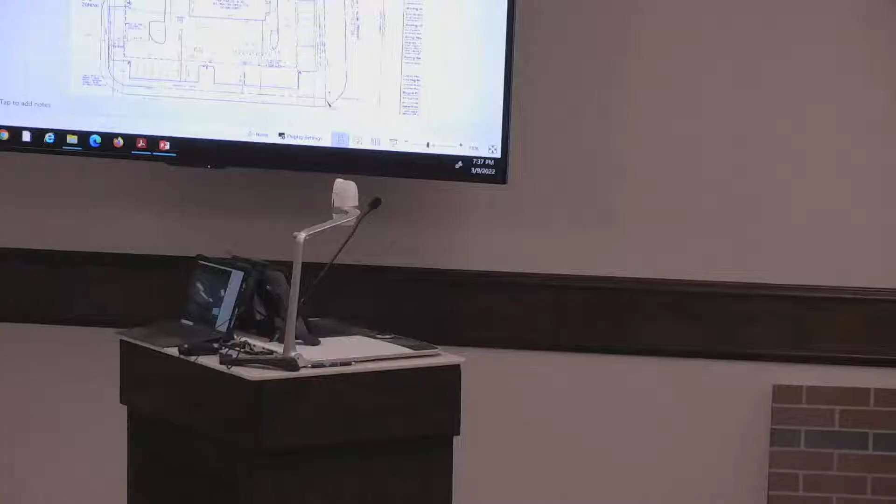Mr. Chair, this is a small addition to the Applebee's restaurant at 10526 Belleville Road for the purpose of having a pickup booth where there will be some vehicle stacking. That land use is most similar to what we would call a drive-through or drive-up window, which requires a special land use in Van Buren Township, even though it's a very small addition to the building at only roughly 400 square feet. All special land uses require both special land use review and a recommendation to the Board of Trustees, along with the public hearing we just held, and site plan review.

So the purpose of our comments at this point is to go through the special land use report and then the site plan reports, and then we'll consider two actions on the project for both combined preliminary and final site plan review, as well as the special land use recommendation to the board. So with that, I'll defer to our planning consultant, Vidya Christian, for her comments.

Thank you, Director Power. As you had summarized, the applicant Applebee's is proposing to construct an addition to the existing restaurant on Belleville Road. The Planning Commission is familiar with the site. It is located on one of Walmart's outlots and is zoned C2, which is Extensive Highway Business District, and it's also part of the Belleville Road Overlay District, or the BROD as it's called.

The proposed use is classified as a drive-through, even though it is a small to-go addition to the building, and as such requires special land use approval. There are specific requirements in the ordinance based upon which every special land use is reviewed and considered by this commission. I shall go over those in brief.

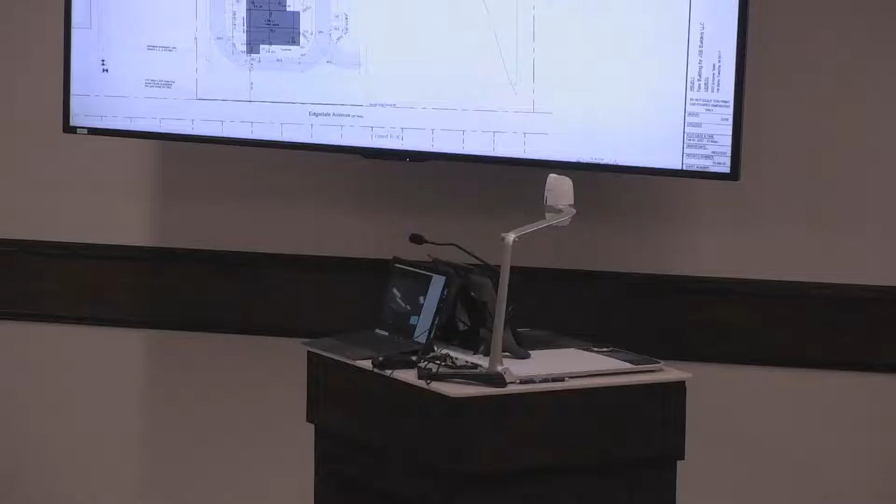Thank you, Mr. Chair. Your summary of the case is all I would have said, so I'll defer this to our planning consultant and then our township engineer, and then I'll speak on the fire marshal's comments before we hear from the applicant. Thank you, Director Power.

As the chairman summarized, the applicant JSB Builders received preliminary site plan approval from the Planning Commission on September 8th, 2021, to construct a light industrial building with multiple tenant spaces and a truck well. That approval was subject to several conditions. Typically, after preliminary site plan approval, they must finish making corrections and meeting conditions along with engineering, then come back for final site plan approval, which is what they have done at this time.

I'll summarize the conditions you placed on this plan in September, since it's taken them a while to come to final site plan approval. They were required to stripe the crosswalk connection from the sidewalk on the south side of the building to the sidewalk along Schooner Drive, which has been done on this project.

There was also the correct notation of the number of parking spaces on the northwest side of the building. There was an error in the number of spaces noted, and they did make that correction.

We had asked for clarification regarding the truck bay shown on the building. On the west side -- I always look at it upside down, so I thought it was the south, but it is not the south, it's on the west side of the building. We asked the applicant for clarification as to how the truck well would be used by other tenants, or if it's limited only to the owner who intends to occupy that corner unit.

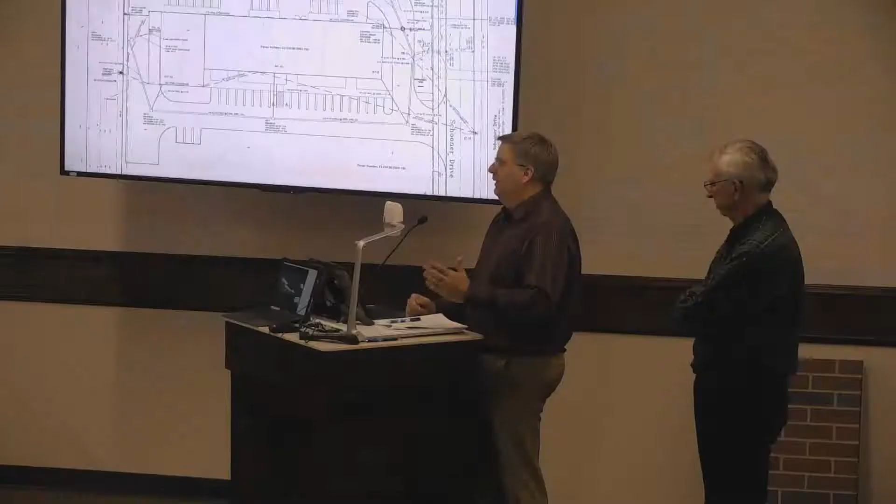So yes, we've been going through this for the better part of a year. Going through the last set of review letters, there are two things we have outstanding. We don't have an issue with putting a date on the development of the landscaping on Schooner Drive. Mr. Patel's a little hesitant about putting that in because we're not sure exactly what we're going to do in terms of drive cuts and sidewalks and things like that, so he'd prefer not to spend money that he's going to throw away. It was proposed, talking to Dan tonight, about a bond that would cover the cost of those trees, which makes sense because that money would then turn around and get spent for the landscaping, and we wouldn't necessarily be wasting it today. If we knew what we would do two years from now, I wouldn't be standing here.

So it's a little bit of a first for him. He's relocating his business to Van Buren Township from Ann Arbor. He's taking the westerly portion of the building for his business, and in his mind, in order to justify building the building, he wanted to do a multi-tenant building that he could rent out to multiple tenants. So we designed his area first, then the tenants, giving them actually the better portion of the site, access to the drive and whatnot, in order to encourage development of it.

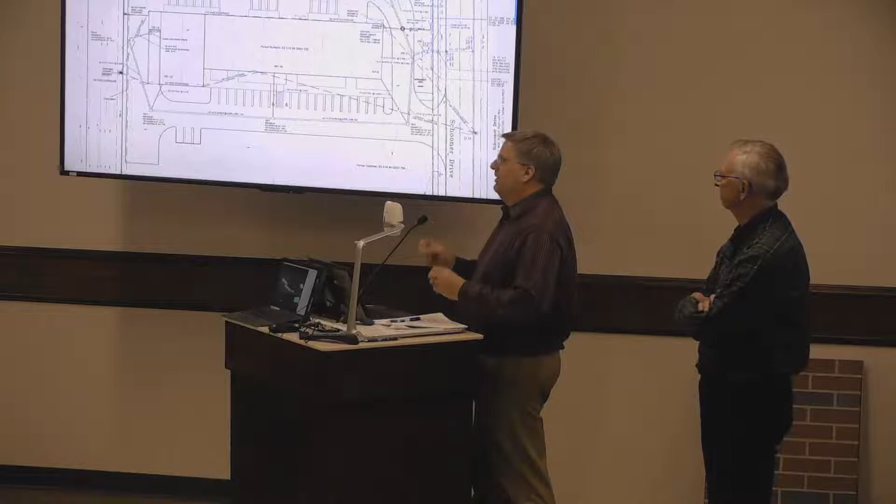He currently is in a building very similar to this without a truck well, and that's part of his problem, because about once a week he gets tractor trailers and it's tough to unload them when you only have a 10 by 10 overhead door. So that was what drove the necessity for the truck well. He may or may not allow tenants to use it—as was stated, it will be subject to their lease agreement. So there's not going to be any heavy industrial use like that, it's light industrial, small businesses, things like that is what he's catering to. In a perfect world, he'd like to build another one of these and then maybe another one, or maybe it's one bigger building depending on how things work out.

But we see what can happen with our economy.

Back to the landscaping, we don't have a problem making an agreement that we could post a bond when we get into construction for future landscaping down here.

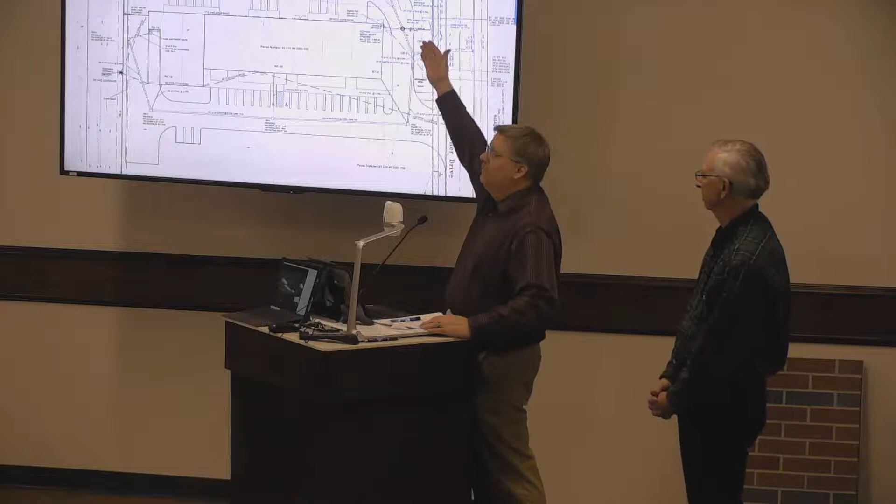I know we've been going back and forth on the stormwater. He bought the property being handed the deed restriction that said you don't have to do detention, so he bought it. We've been working through all kinds of documentation to see if we could find any information, because somebody approved it—otherwise it wouldn't be there. The two adjoining properties to the north are using the stormwater system in the street, draining to it. There are leads to the property that have stormwater calcs to them.

So we're willing to work through this and try to figure it out. What was the name of the engineer? Oh, Stantec. We will reach out to them and see what we can track down—there's a job number on there. We'll work with you guys. Hopefully they've got records, and I sent some additional information today to Orchard Hills, so maybe they can pull something out of their files. It's funny, 1998, 2000, 20 years ago, that's a long time ago. I have everything I've ever done as an architect going back to '92. So I find that odd, but whatever.

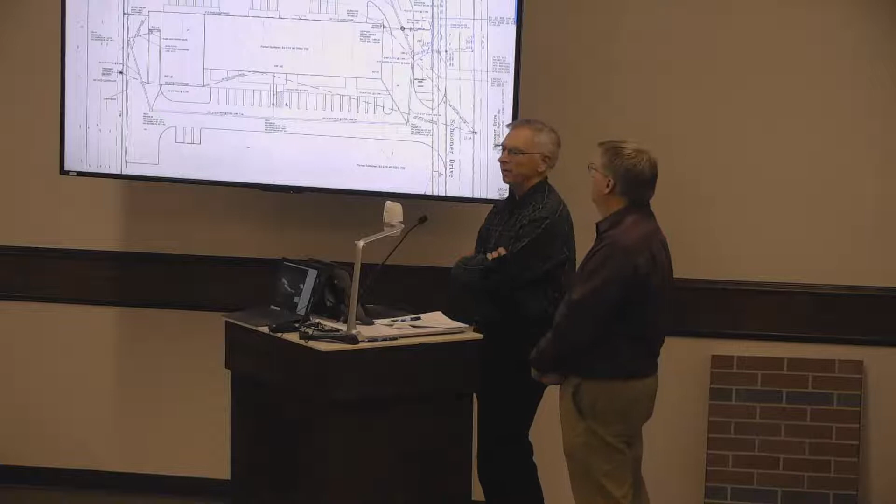And if I could add just briefly on verification of the storm system, we're glad to work with you on details to figure out how to verify what's there, if we all go out and look at it, because there are end sections and culverts, under drains—it's not all enclosed. We don't have to go down into manholes to see how things connect into the open drain going down to the pond. We're glad to work those details out with you to your satisfaction. Okay, same here, guys. Okay.

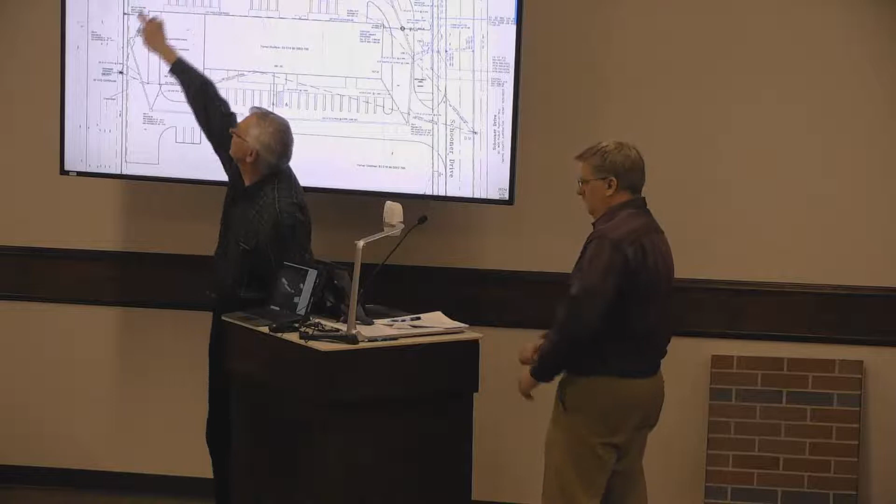And if I may, for the hydrant coverage, we did speak with the fire marshal and sent out new drawings that I believe he approved. We're taking this hydrant and putting it here, and I believe he's satisfied. Yeah, that was my recollection as well from talking with him.

I don't think I broke your building here. Sorry for the trap there. Questions you may have—thank you so much.

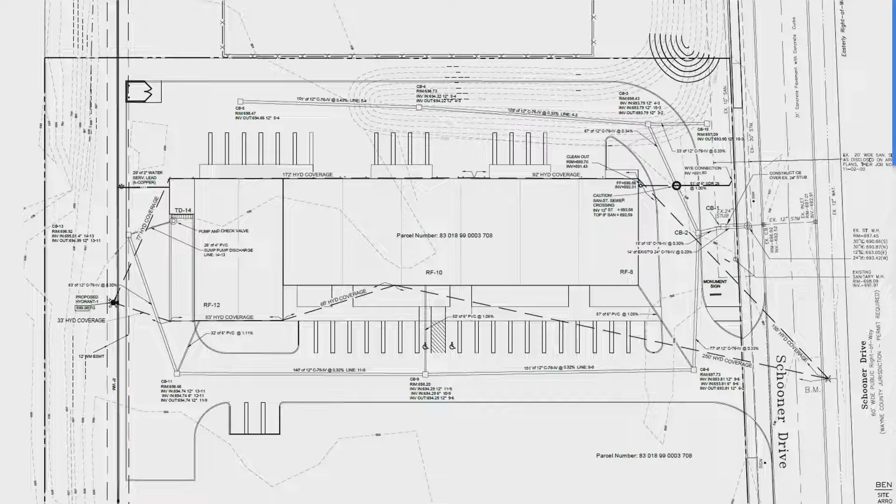Any questions or comments from commissioners? Commissioner Jar: I do have a question for Mr. Potter. What is the applicant's recourse if they cannot find the information on the drainage system that you're looking for?

Well, we're trying to be positive that they will find some records. There are records somewhere, but as was stated, several years ago around Y2K, if things weren't microfiched they usually got pitched. A lot of these older drawings—record drawings for permit applications and plan reviews—disappeared. It was paper and could fill up a room like this. Things happen. So if the microfiche doesn't exist, later on they scanned all that and threw the microfiche out. So it's a task trying to find some of these older as-built drawings, and we look for record as-built drawings.

The other recourse would be to try and reverse engineer it, but for this property owner it would be quite an exercise to try to recreate something that's there, because it involves potential easements with a county drain, as-built easements based on the amount of flooding, and that should have all been taken care of in the original plans when the property was developed and the original plat was dedicated. So we do see a lot of things that show up on deed restrictions that, quite frankly, are no longer valid or legal later on. That's why we have to look at it—we know what it says, but we don't know what that means, so we have to have documentation to show it. Unfortunately, we have some drawings now that I think you received this afternoon, so that's a start.

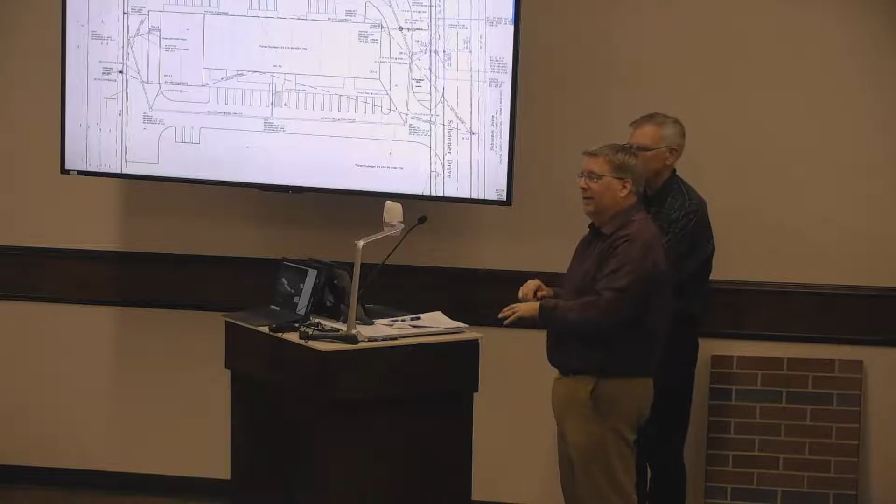No, our understanding is the west side of Schooner, the entire road. Does it include Contractor Steel, which is to your south after the vacant lot? Well, it might, based on what you found tonight. Because Contractor Steel went through a site plan approval, or they almost went through engineering for an addition not so long ago, and then they abandoned it.

They might have some documents that might help you. You might want to reach out, because I know Mazer Polymer built not so long ago, and so did Contractor Steel. They went through the project process, but then they decided not to build for whatever their internal discussions were. But maybe they have some engineering documents that might help you.

Yeah, the engineer that did the two northern properties was adamant that we didn't have to do stormwater detention. So I'm like, let me see your stuff. He moved from one office to another in that timeframe. He's like, he found a few fax documents and some stuff with OHM.

Do the owners of those buildings not have copies of their original approval documents, even if the engineer is gone? I don't think they're the same owners. It's different names in the agreement than what's occupying those buildings. Now, it's possible, but I find it might be that most owners don't have anything.

Right, it might be worth reaching out to everybody down the street, including Contractor Steel, to hunt those down. Steel might be the best bet, since they were there 22 or 24 years ago, right? Yeah, contractors don't throw anything away, okay?

So I will add one more thing. I did take the time to call the Wayne County reviewer, who is OHM, and I spoke to the engineer and I said, how could you approve this without acknowledging these plans? And he said, well, that's come up, we're being questioned on that. So they may be rescinding that letter, but it's for the same thing.

And it's just a factual thing that has to be buttoned down here to say, okay, does it in fact exist and where? Because if it exists, I can tell you it's an easy calculation that was done: the drainage breakup sheet, the calculation, the follow-up easements, their as-built easements, and it should be fairly easy, but you just got to find the drawings, okay?

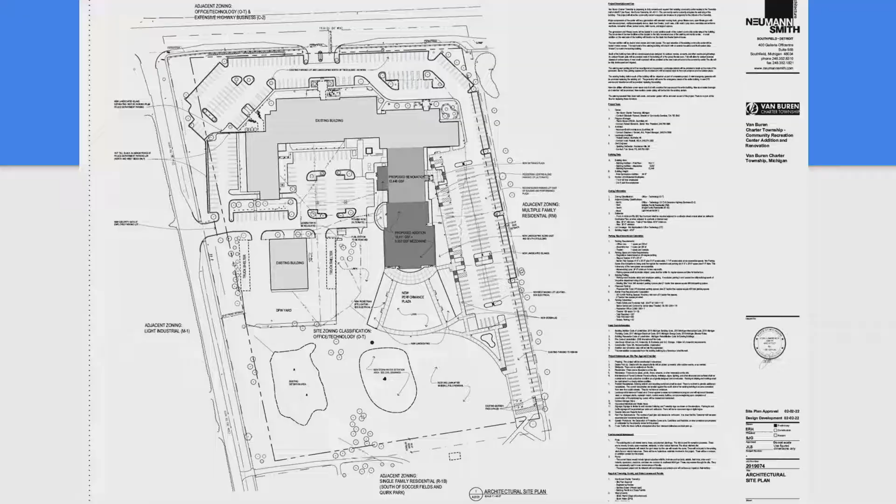I can summarize it, but I think our applicant will be able to go through that better than I could. But there are going to be a variety of indoor and outdoor activities at the site, and again, it's on a campus that's about 14.5 acres. The proposed building addition, by the way, has a height that'll be about 34 feet, 8 inches tall.

There's a portion of the architectural site plan included in your packet that goes through all of the programming of the site. Just to summarize, it's a publicly owned recreational facility. That's the basic use that's being proposed for the addition. That is a permitted use by right in the OT zoning district.

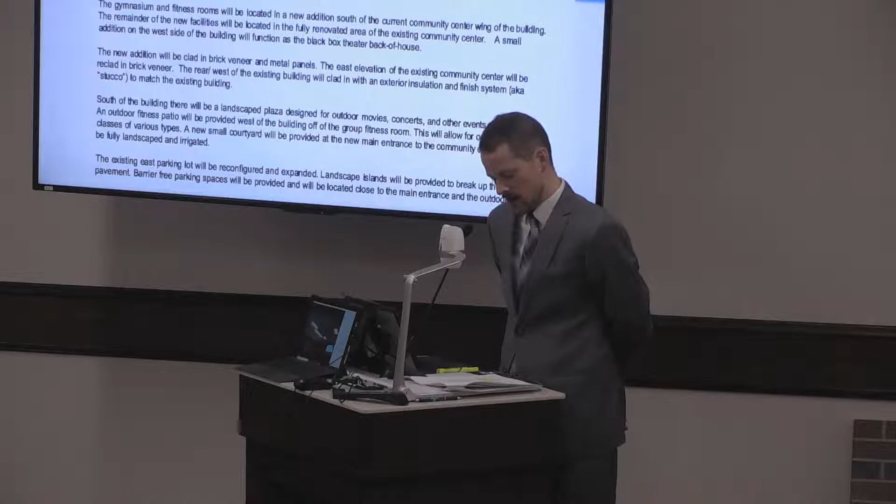It behooves us to acknowledge that there are aspects of the site that are outdoors, and these are accessory to the principal use. That's important to mention because outdoor uses as principal uses are prohibited in the OT zoning district. But of course, within the OT zoning district, you have public schools, public recreational facilities like this one, and this one has been used in the past for a variety of both indoor and outdoor uses. So this is very much consistent with past use of the site.

Again, I'll let the applicant speak more about the programming. My comments are more about the exterior of the site and the architecture of the building. In looking at the overall site, I'll go through a series of comments that fall into categories guided by our zoning ordinance. Firstly, the dimensional requirements of the site are met.

There's a required 50-foot front yard setback, a 50-foot side yard setback on sides adjacent to residential zoning, and a required 30-foot rear yard setback. There are some boundary lines that are listed as approximate on the site plans, but the improvements are consistent with the existing length of improvements on the site. So as long as there's no encroachment within a few feet of that property line, there should not be any issues with that note in the plans.

I would like to go through some things regarding access, circulation, and traffic impacts. Overall, one of the most important things to note with the site is that based on some restrictions that were sought by our elected officials and our public safety department, as well as our public services department, there is a restriction of access to the employee parking and public safety personnel parking areas. This does affect some of the layout items on the site.

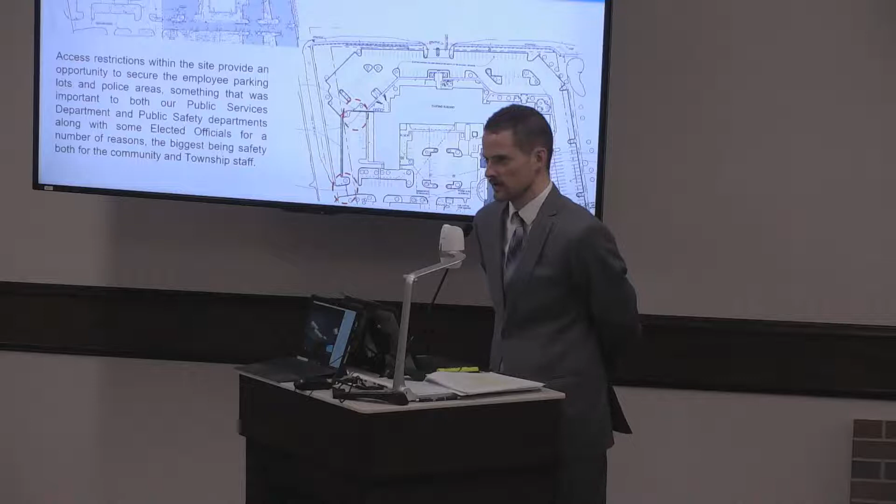Right at that northwest corner of the site where the parking lot angles in, there will be a closure and a little bit of a landscaping island there. There will also be a gated access for employee parking. The public safety justification for that is compelling, and the design of the building supports that closure.

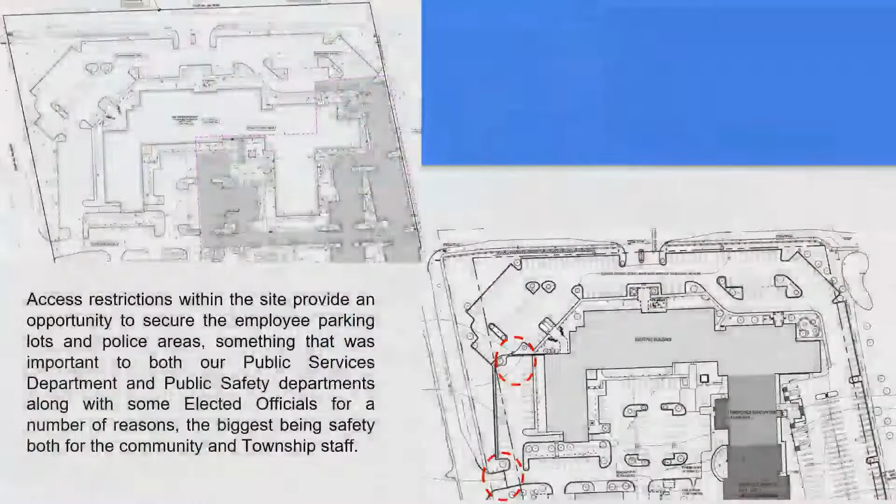It's important to talk about this because we have to acknowledge there are about 400 parking spaces proposed on this plan, about 305 of which will be visitor parking. That parking will access Tyler Road on the main driveway.

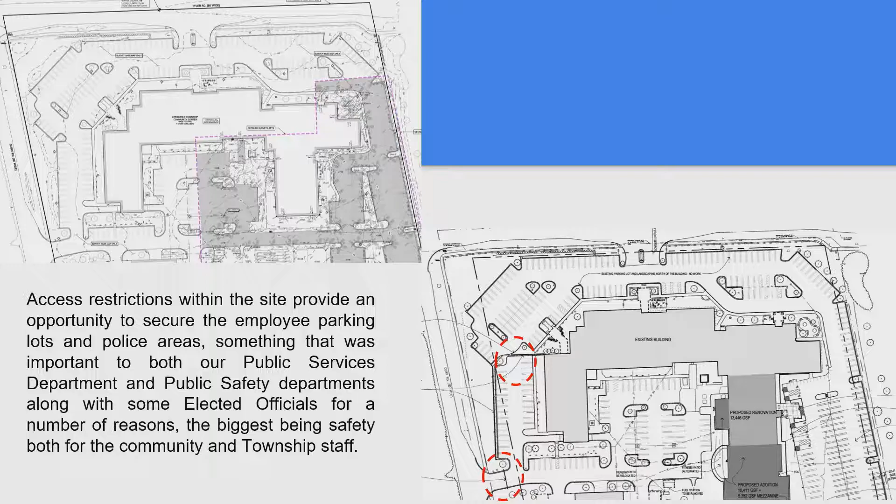In reviewing that, both staff from the applicant's side and reviewing staff have talked about this, and it is a logical way to organize the access to the site when you consider that a lot of the use of the building involves complementary activities, smaller gatherings in different spaces within the building, and it's very unlikely that the entire parking lot will be full at a given time. So overall, I do recommend that the Planning Commission approve the access configuration for this site.

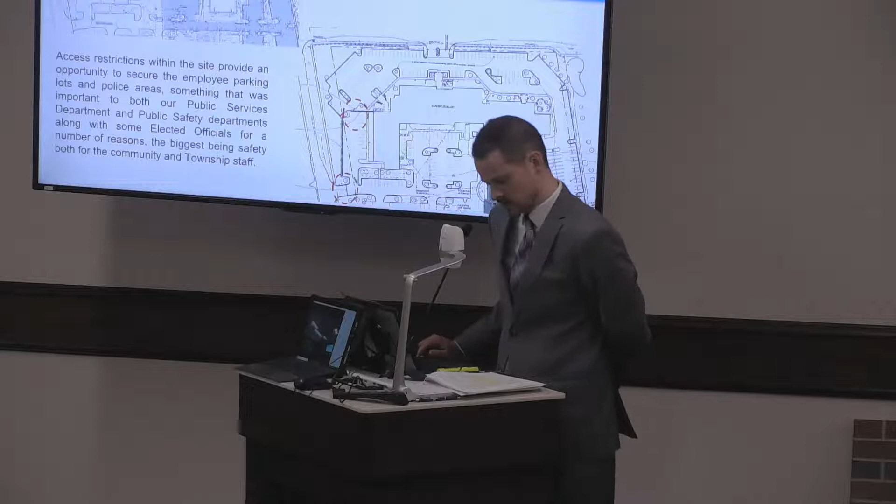A couple of minor notes: there will be significant additions of sidewalks throughout the site. At a high level, you're going to have sidewalks that access the parking areas along the east edge of the building, as well as the campus along the south end of the building throughout the area that connects the parking to the plaza.

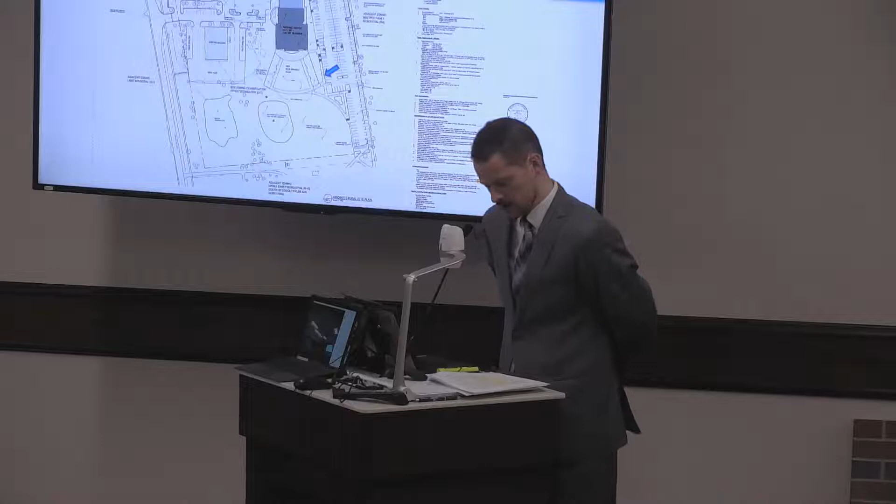Parking spaces—this is a point that comes up in every site plan review. The applicant has demonstrated both the adequate dimensions for parking spaces as well as the adequate number of minimum parking spaces. There's only a small addition of parking on the site with this proposed site plan, but it does meet the minimum zoning ordinance requirements based on the usage of the building.

This includes 181 spaces being required for the community center and senior center, 7 spaces required for the recreation center, 50 spaces required for the theater, as well as 119 spaces required for the existing Township Hall offices and public safety areas.

One condition I have regarding parking configuration is that there should be a designated snow storage area in the parking lot to make sure there's adequate room to place the snow in a way that doesn't conflict with parking.

Landscaping and screening is a big source of a lot of planning review comments. We have a very robust landscaping ordinance, and it was important for us to reflect that ordinance in this review, making sure we were fairly reviewing this in a way that really reflected the portion of the site that's being worked on today.

There has been a recent overall campus re-landscaping effort in the last couple of years, with new landscaping installed on the north and northwest edges of the campus. So what I really wanted to do here was focus on the area of the site that's being improved and apply the applicable landscaping standards to that portion of the site.

I'll read from those standards. The first, under section 10.103A of the zoning ordinance, regards frontage landscaping. There really is no new frontage area adjacent to the public road, so that standard is already met and does not apply to this new review.

When we get into parking lot screening, there's a 10-foot open space buffer surrounding parking lots along the site's frontage, and that remains in place. Then you get into the details of the parking-based ordinance requirements, which get pretty detailed. To summarize: essentially 5% of the interior parking lot area requires landscaping, and there shall be one deciduous tree planted for each 300 square feet of interior landscaping. Those are some of the most significant requirements regarding interior parking lot landscaping.

Based on those requirements, the applicant has met the minimum standard by providing about 3,203 square feet of overall interior parking lot landscaping required, which would be about 11 or 12 trees, and there are 15 trees proposed, so this standard is met. There's no new loading area and no new display area, so there are no landscaping requirements regarding those items.

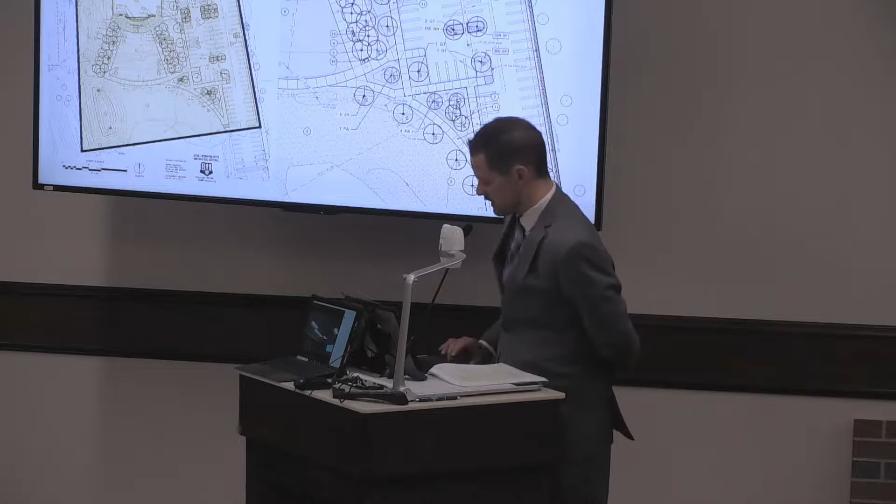As far as green belts, this is an important one to go through. You can see on this image the line of the existing parking on the east end of the site—it's less than 5 feet from the adjacent property line. Now, the adjacent property line is the Meadows of Van Buren condominiums, a residential land use. However, there's a significant existing open space buffer separating this site from any of the neighboring properties.

So it's reasonable to maintain that line of parking adjacent to that site and continue that reduced setback. I would recommend that the Planning Commission modify the green belt along that east line from what's required—20 feet—down to the 4 feet 9 inches that's existing.

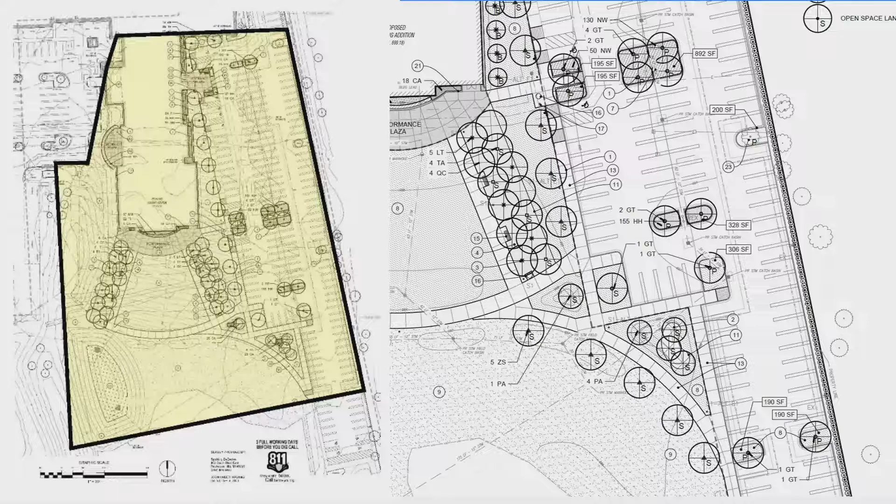This reduced setback has not been an issue for any of the past uses of the site. There's been no issue with the relationship with the neighboring property from softball games or other outdoor activities. And there will be significant shrub landscape screening along that edge of the site, so staff supports modification of that Type B greenbelt buffer requirement along the east edge.

I also recommend that the Planning Commission modify the standard requirement under section 10.103E subsection B to enable 3 shrubs per tree in place of what's otherwise a requirement for 1 tree every 20 feet along this area, based on some constraints on the space available for a root ball of a tree.

Getting into some specific standards for the office technology zoning district regarding landscaping. Essentially, your perimeter of your building defines how many trees and shrubs you require around the perimeter of the building. This standard is met, except for one adjustment I'm requesting, which may be due to some lack of clarity on the requirement.

There's actually 1 deciduous tree required for every 40 feet of perimeter, and 1 ornamental or flowering tree required for every 100 feet of perimeter. The provision by the applicant has been switched, so there's more ornamental trees than shade or deciduous trees. I'm recommending we go back to the ratio of 1 shade, deciduous, or evergreen tree per 40 feet and 1 ornamental tree per 100 feet. So that's a minor adjustment to the plant list.

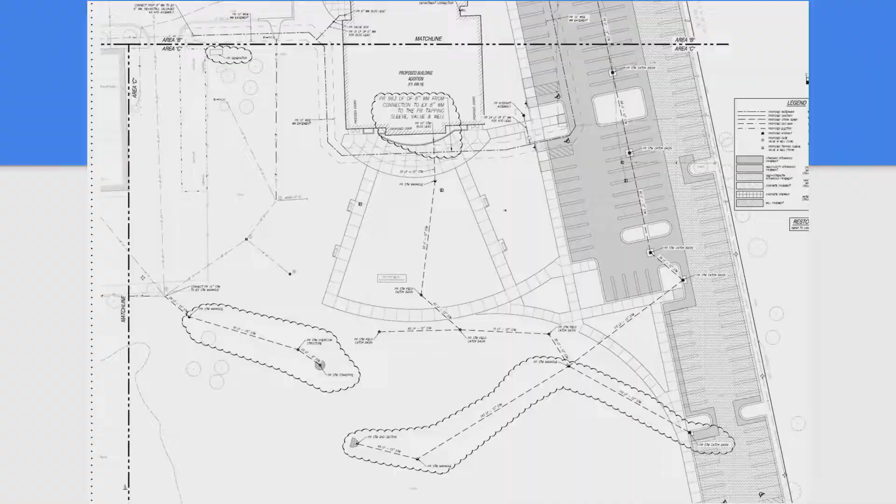Quickly on lighting, there is existing lighting that's being relocated, so there's really no new lighting to consider. There are no proposed changes to the dumpster. There is going to be new fencing, with a fence detail provided where the fencing secures the employee and public safety areas. I would also ask for a detail on the proposed gate to the employee parking area.

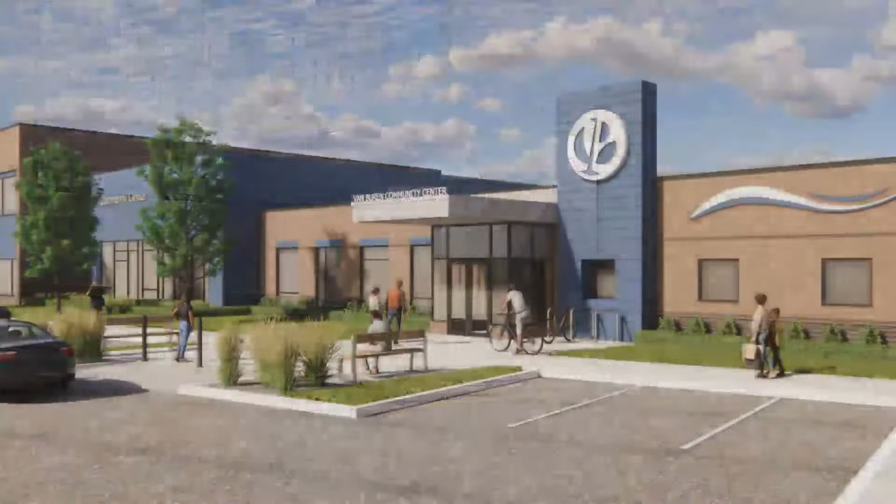Finally, maybe of most visual interest, the architectural character of the proposed addition. There are specific architectural requirements under the zoning ordinance specific to the OT zoning district, which calls for certain treatments including pitched roofs. However, there are findings the Planning Commission can entertain to deviate from those standards. In this case, we have a building that's multi-level, both existing and proposed, more square, with protrusion and depth created by rectangular and square shapes. I think we can modify the requirements of the OT zoning district to allow these changes.

What you're looking at here is architectural metal panel, brick veneer, and glass veneer—high quality architectural treatments on the building that I think tie it in well with the existing building. I think the Planning Commission can accept these architectural treatments, subject to your commentary on them.

The last few comments pertain to signs, and then some topographic and grading information. Signs, there really is not much to say at this point. We'll process our own sign permit for any proposed signs on the face of the building. You can see what the character of the signs is on this elevation. And grading information, there are some minor grading adjustments throughout the plan that are shown.

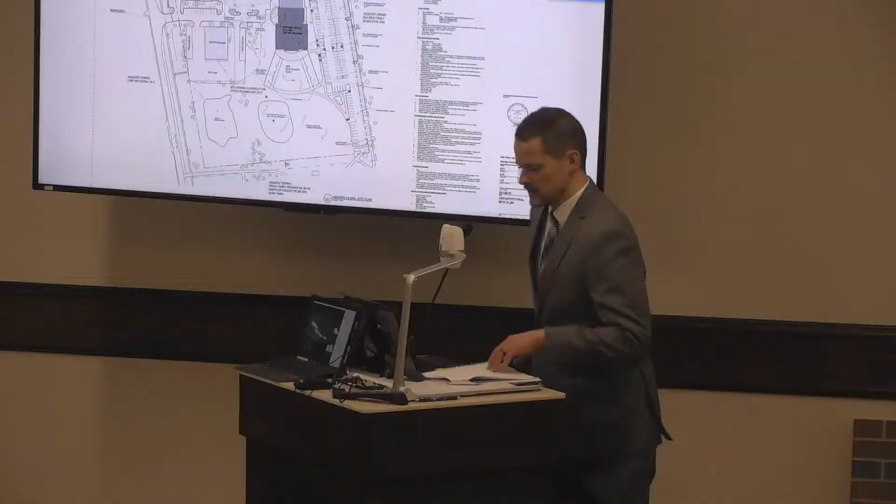Director Power, I believe there's a letter from the Van Buren Fire Department as well. There is, and I'm going to jump over to the other microphone, but I have one clarification in that letter. I'll read the comments, but there's one thing that has been addressed in the most recent correspondence with the fire marshal. His comments summarize that the plan as submitted is approved with some exceptions. The first one, which is the one I'm going to talk about, is that there is a dead-end fire department access road in excess of 150 feet.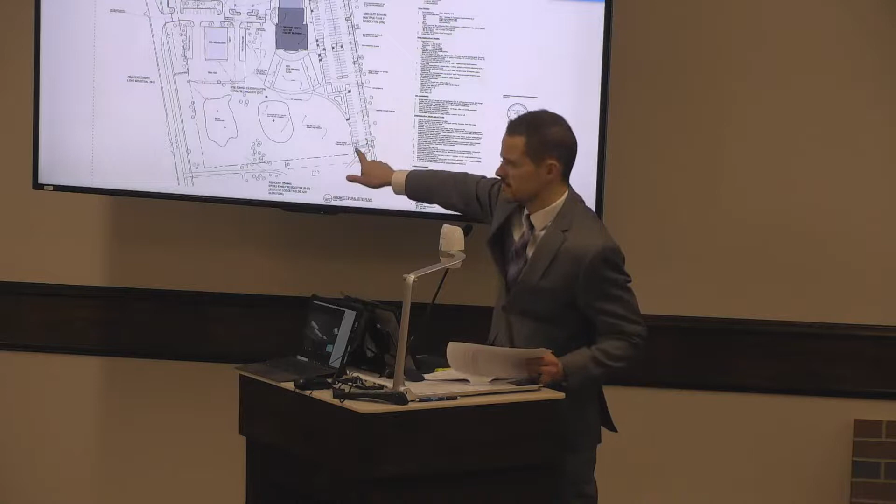What we're talking about there is, if you see on this plan, the long run of the existing parking down in this section of the site includes a length that exceeds 150 feet, and basically the fire trucks need a way to turn around there. However, that's an existing condition and there are no buildings in that portion of the site, so there's really a lot of flexibility to deviate from that requirement. The fire marshal and fire chief have looked at that closely, and they're willing to modify that condition of their report.

Otherwise, there are some comments about water supply. A fire department connection should be unobstructed by vehicle parking. The fire department connection needs to be moved to the southeast corner of the building by the hydrant, or one parking space in front of the FDC, or fire department connection, will need to be eliminated and marked accordingly. Then there are some things that will be addressed during building plan review, such as building, fire suppression, and fire alarm plans, and the provision of a two-way radio communication enhancement system, and making sure there's minimum required radio signal strength for fire department communications.

This is the overall site plan. This is actually an architectural drawing overlain on a Google map image. You can see Tyler Road up at the top, and curving around here is the existing Township Hall, which we are proposing to renovate. This lighter brown area is the area that's going to be renovated, including the existing gymnasium and other spaces in the existing community center. This block down here is the new gymnasium and fitness addition we are adding.

To the south, we are doing an outdoor performance plaza, a concrete area with a large lawn framed by two groves of trees. This performance area will be used for outdoor concerts, outdoor movies, open mic nights, and other events. It's planned to be used mostly during the day, but could be used in the evening as well.

We're also proposing an outdoor fitness patio on the west side that will be used by staff for outdoor yoga classes and things like that. It's right off of the fitness room, which you'll see when we get to the plans. We also have a new entrance on the east side of the building, which ties into our reconfigured parking lot that runs all the way down to Quirk Park.

We've made one adjustment since we submitted for site plan approval: we are going to extend the new sidewalk all the way down to Quirk Park and tie it into the pathway down there. As Dan mentioned, we are closing off the police and employee parking lot over off Quirk Road with a 5-foot-high decorative fence and a security gate at the entrance to that point.

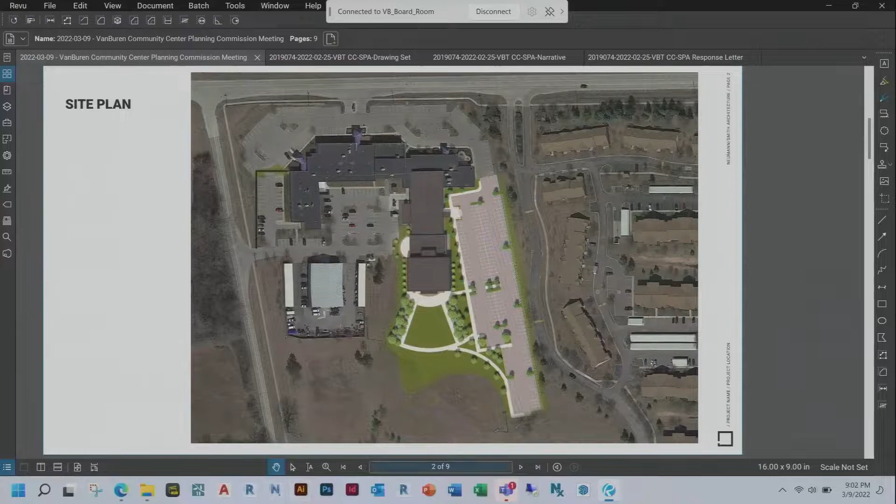As you come in the front doors of the building, the new entrance, there's a new lobby and a new control desk. Behind the control desk are the community center offices. Directly across from the main entrance, we have the Black Box Theater, and behind that a small addition that'll be the back of house space for that theater, including changing rooms and areas to put scenery and props together.

As you come down the hall along the administrative offices, you've got the restrooms and locker rooms, and further down, a multi-purpose party room and a renovated senior room.

Heading to the south, immediately adjacent and open to the lobby, we have a teen area with various seating for kids to hang out. There are actually three 4-person booths where they can sit and do homework or play video games, plus some soft seating and gaming tables. That furniture has yet to be worked out in detail. Across from that, we have a child watch room or playroom and another multi-purpose party room.

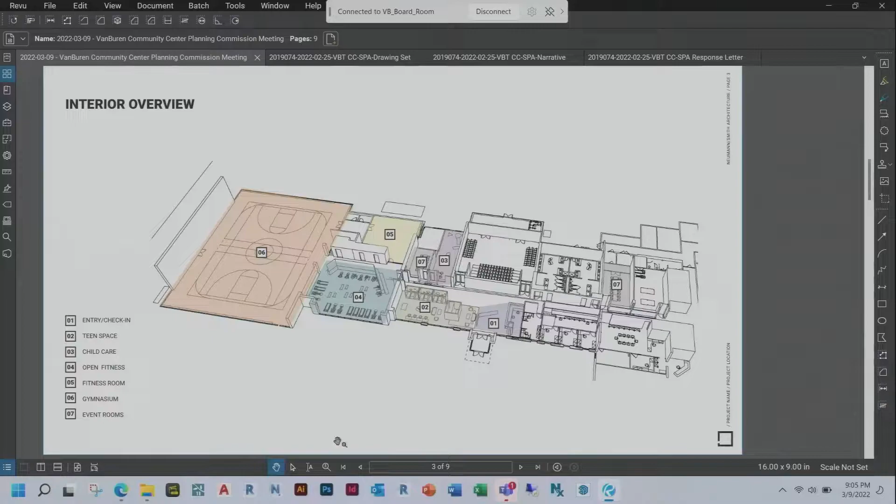This is just the floor plan that we just looked at, if that makes things easier for you to see. Again, we have the new entrance here, the Black Box Theater, the back of house space for the Black Box Theater, the office area, the locker rooms and main restroom facilities, the party room, multipurpose room, the updated senior area, the teen area, the child watch or child play area, another multipurpose party room, the open fitness area, the group fitness area, and then the gymnasium.

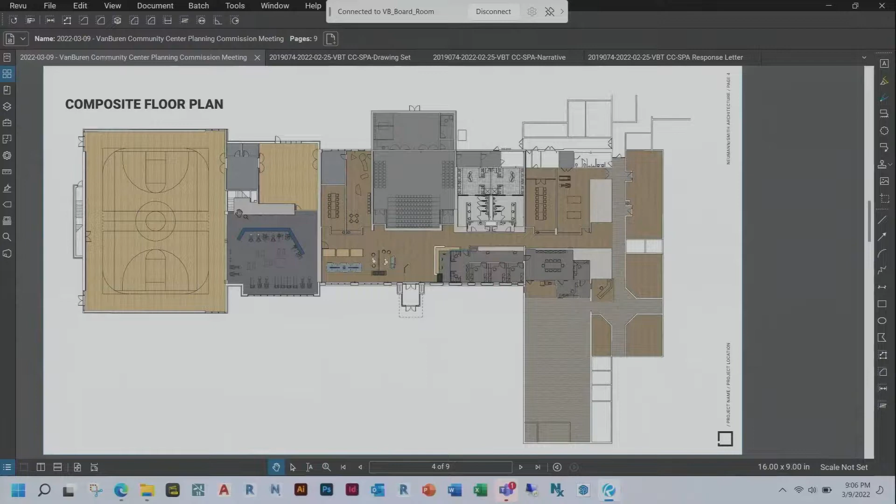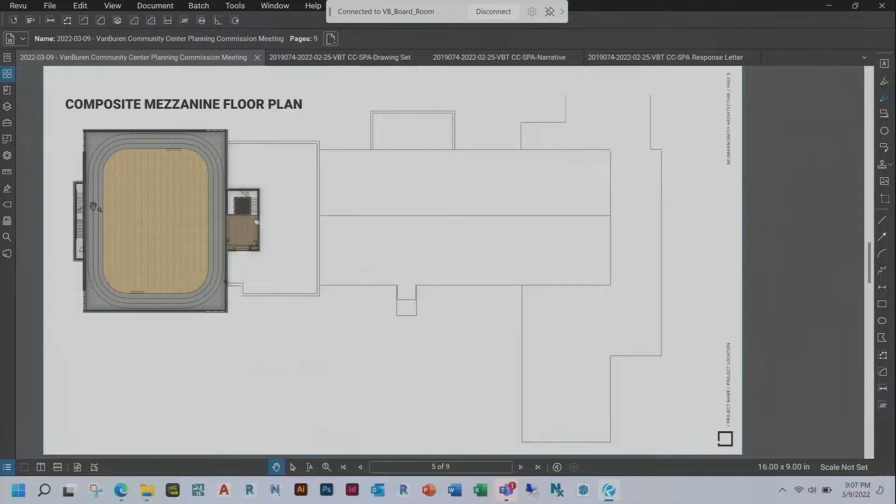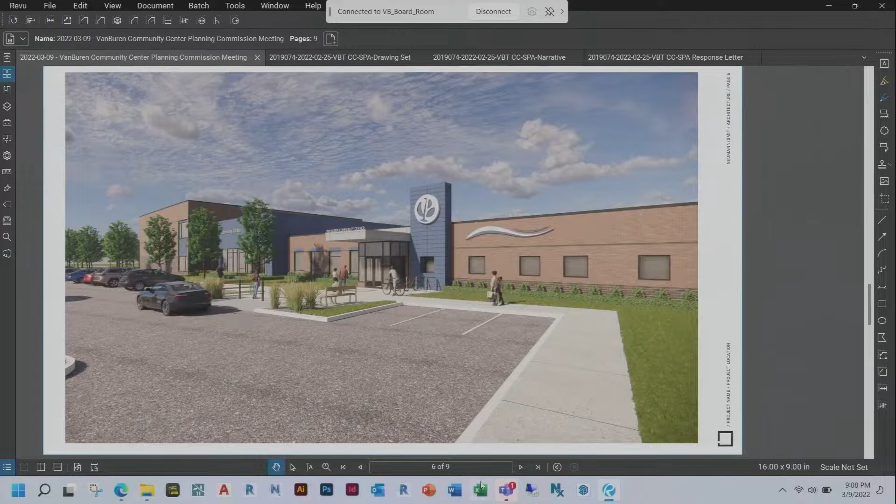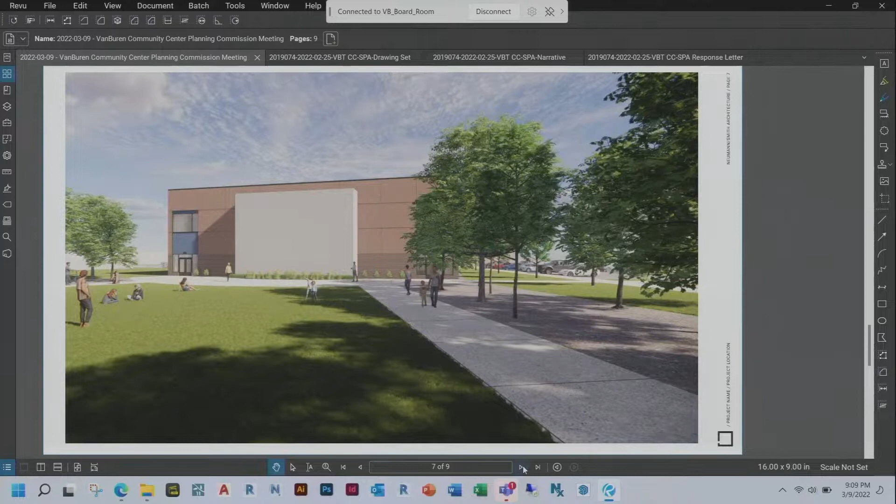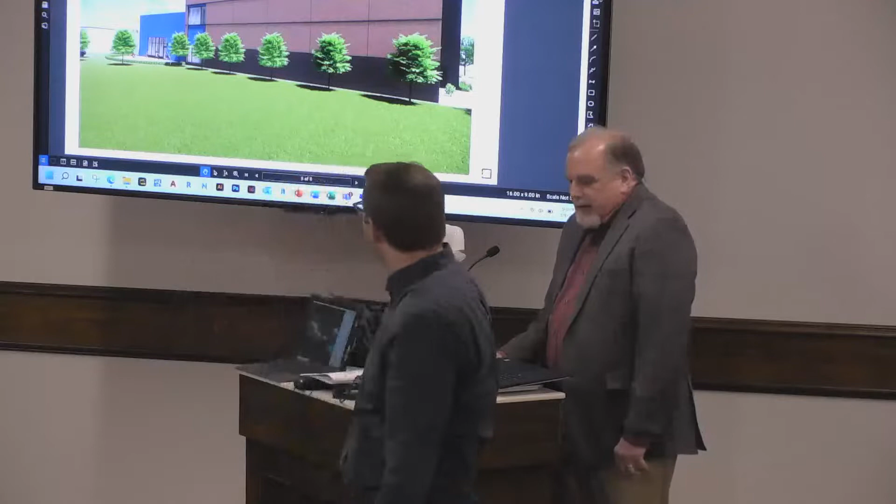And this is the west side. This is the gymnasium again. We are using 3 different brick, and we've actually got a brick panel here to give you an idea of what that looks like. We have a field brick, we have some accent stripes, and then at the base, to help break up the big facade, we're using a blend of a dark brick and a third textured brick. I'll bring that around a little more. And then as you get further down, again, we've got the group fitness area with the outdoor patio.

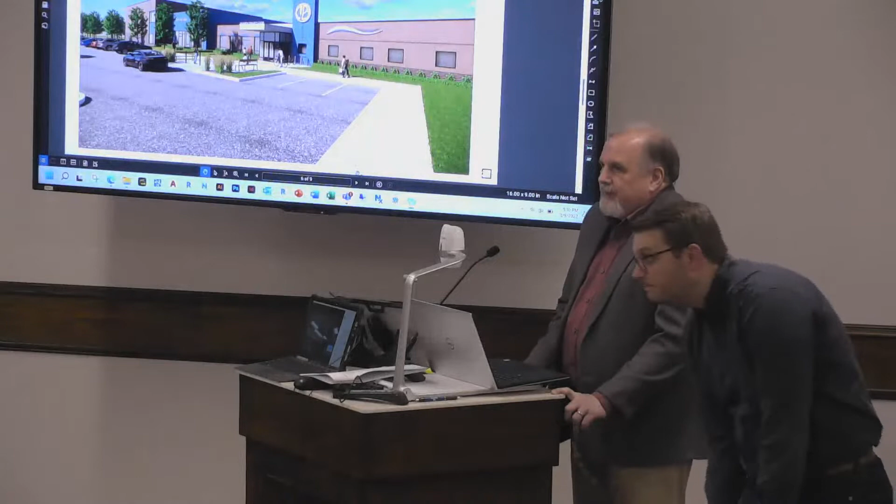So that's our presentation. If you have any questions, I can go back to any view that you like. Maybe start with this one. All right, well, thank you so much. Great presentation. Comments, questions from commissioners?

I do. The chair mentioned - I don't think we mentioned in the audience tonight, we have our, also with the applicant's team, Elizabeth Renault and Tammy Doring, our Community Services Director and Deputy Community Services Director. So I'm sure they'd be glad to - I'm not sure if I got that right, but they'd be glad to answer any questions you have about the project. Sorry, Tammy.

I have a comment, Commissioner Jar. It's a very nice looking addition to the building. I think that's a great picture. With regard to our section 3114 F and the requirement for peaked roofs with flat roofs being discouraged but not forbidden, I would say that if this was a standalone building, maybe a new building, maybe even on the same parcel, I think I would be very much in favor of seeing the peaked roof as a design standard. But since this is in addition to a building that already has a flat roof, I think it really looks nice, and I agree with you that it's very harmoniously designed. I don't see a problem with having a flat roof extension in this case. Don't know how the other commissioners feel, but I think this is an acceptable look.

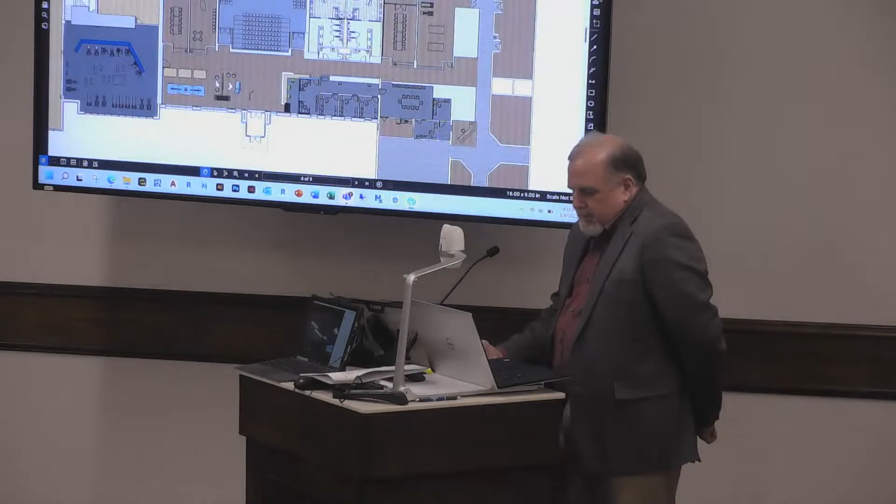We actually have kind of bleacher-type seating that comes out from the wall, but it is comfortable seating, not just a bleacher. We have loose seating on either side. So this can be configured in many different ways to have theater in the round, small plays, a comedy night. There's a wide variety of things you can do with that space.

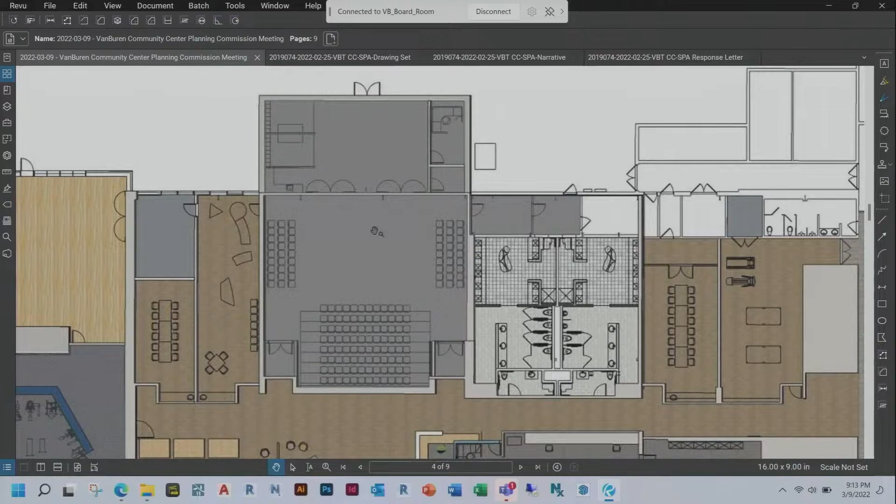Great, thank you. I did have one other comment regarding Director Power's recommendation for reducing the greenbelt buffering. I think it's important to note that we have in our ordinance the ability for the Planning Commission, under Article 10.106, to make modifications to the greenbelt standard if we feel the requested modifications are keeping with the intent of the landscaping and screening requirements. I think it's important for us to discuss that briefly. Having reviewed the site, I believe that's a good recommendation. Reducing the greenbelt width is something I support, and it's a power that the Planning Commission specifically has. I don't know what the rest of the commissioners think, but I support it.

Thank you, Commissioner. I would agree. The shift with the greenbelt size, the roof - I love the design of the building. I can't wait to see the project start coming together.

I have a question for Director Power. You made some comments at the beginning about the acceptance. You had written that you wanted a written statement regarding the public safety closure of access, but then you mentioned you were asking us to approve that tonight. So if a motion was to come up for this, would you like that included in the motion, or would it just be the commissioners acknowledging that that would be satisfactory?